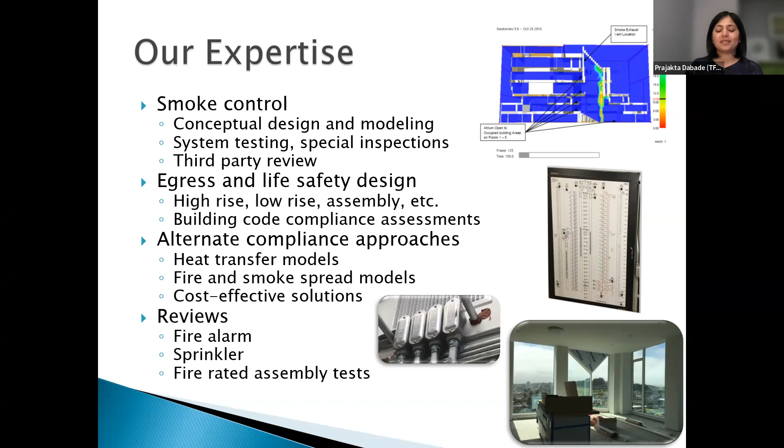So the general history of model building codes - if you go back to the 60s and 70s, if you've done any projects with older buildings, we've seen a lot of UBC, Uniform Building Codes. Eventually we have NFPA and IAPMO, and the ICC was formed, I believe, in the late 90s or early 2000s. California picked up the ICC code starting, I believe, 2007 was the first IBC code that we adopted. The code cycle is every 3 years, and now we are entering from our previous code cycle, which was 2019 based upon the 2018 IBC, into the 2022 brand new codes - very exciting, a lot of information.

Every day we look at projects, and every project has very unique requirements. We learn as code consultants every single day something new about the new code, so we're trying to share what we know thus far. Next time we talk to you, we'll have more information.

This new code - any project submitted on or after January 1st of this year will fall into this new code cycle. Of course there are exceptions - if you already had a project in plan check and had 1 or 2 cycles of plan review, you can continue with those. There could be some projects that are kind of grandfathered in, and they may continue with the previous code cycle. But anything submitted for permit in 2022 will fall into this new code cycle, including your tenant improvement projects. Next slide, please.

I would highly suggest, whenever you have a term and want to see what it really means, the first step is to go to the code's definitions and look for the term—like what is the secondary structural members per the building code. From chapter 2 you can, at least as a first step, find out what those words mean per the code.

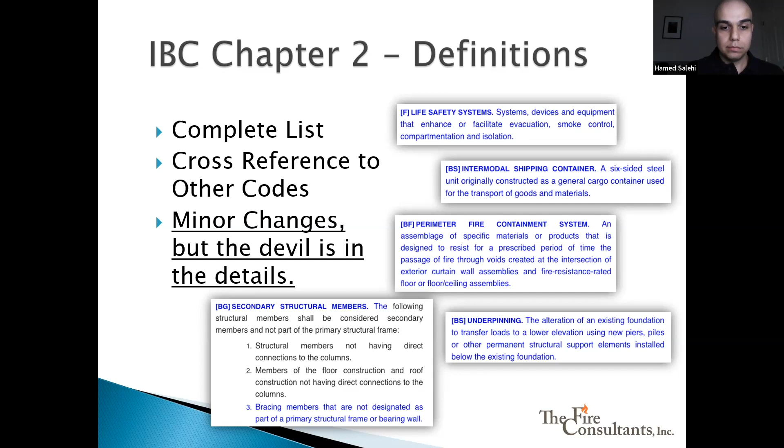As we move on to the next chapter, we have chapter 3. Chapter 3 basically defines the different uses and occupancies in the building, starting from the assembly group, going to business, all the way to different common or uncommon occupancies, and basically provides a short definition and some examples for each occupancy. And there are not many changes in the new code.

There are some definitions added for the special amusement areas, like the code added a definition for the escape room or the puzzle room, and then added some items for distillery brewing facilities, but there are no major changes in general in chapter 3 for the use and occupancy classification.

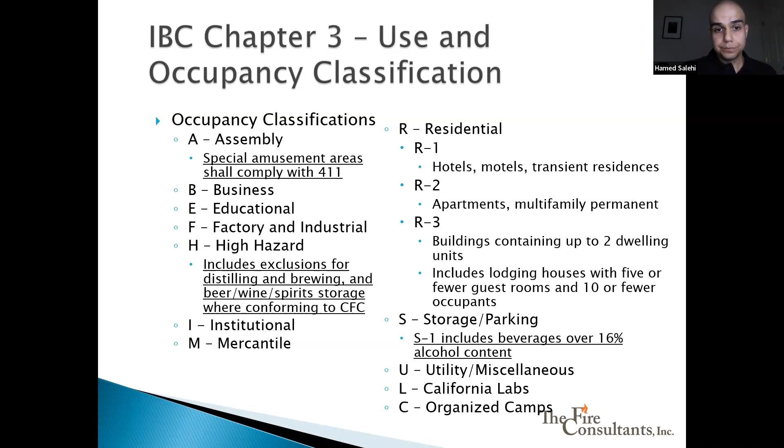As we move on, chapter 4 is basically providing the requirements for special use buildings. In general, we have two types of special use. One is the general special use, like high-rise buildings, atriums, underground buildings, which typically don't have any specific use or occupancy, but they can have different occupancies within them. But they have a general common feature, like a building that is going to be a high-rise, but it can be either a group B occupancy or group A occupancy or whatever the occupancy group is. But just being a high-rise building, it needs to meet certain features and code requirements. So those are covered in the first portion of chapter 4.

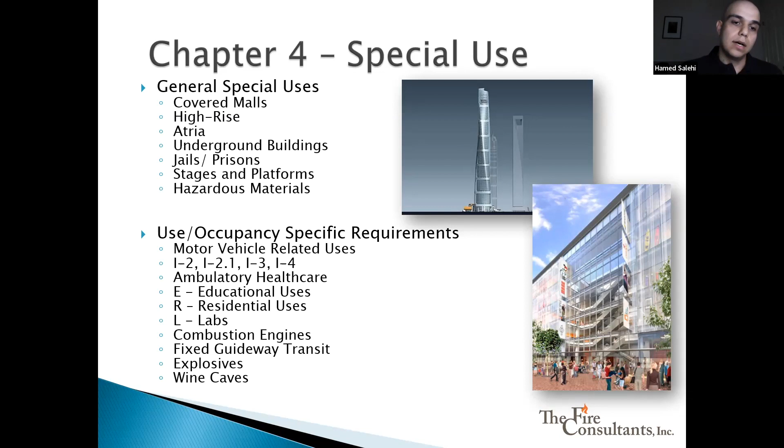And then as we move on in chapter 4, there are the occupancy-specific requirements, like what if you have a group R occupancy, what are the requirements? So if there is any specific occupancy with a specific requirement, those are all listed in chapter 4.

One example for the general occupancy is definitely the high-rise building. We've seen many projects where these requirements are applicable. Basically, the code defines a high-rise building when the highest occupied level is more than 75 feet from the lowest fire department access. If you have a high-rise building, then there are a lot of requirements that are applicable to the building, from smoke control to fire pump.

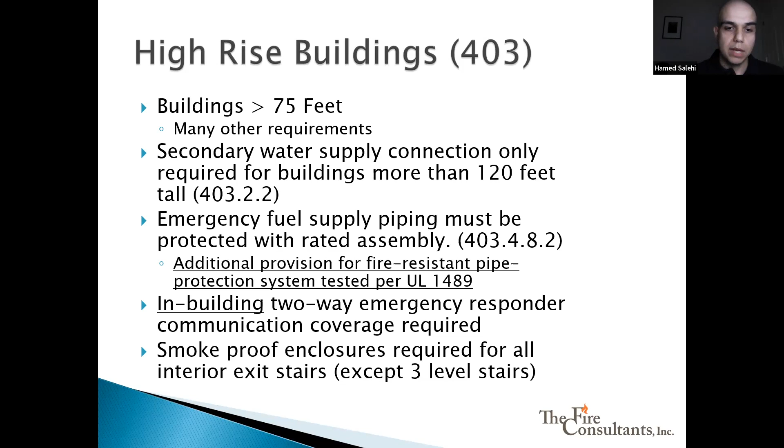And then there are some other items like secondary water supply for buildings more than 120 feet, or having the ERRCS emergency responder coverage, or having the smoke-proof enclosure, such as the pressurized stair. These are all listed in chapter 4 for the high-rise building. Again, we don't have many major changes in the new code for the high-rise building. Most of the requirements are carried over from the 2019 code, so there might be very small details that have been updated.

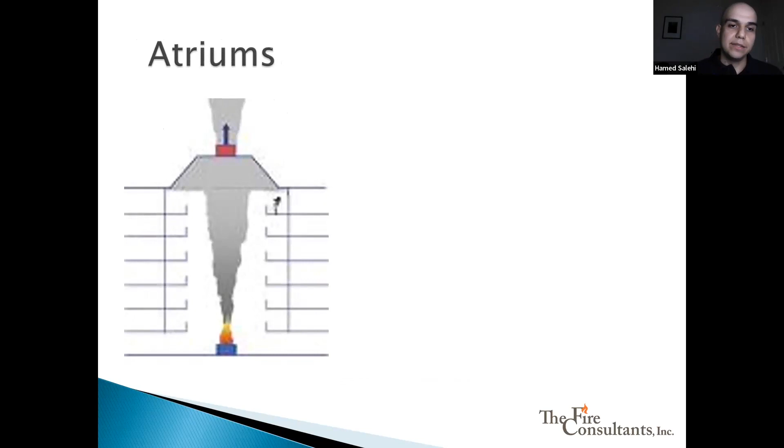The other type of project that is still under the general special use of the building is the project where you have an atrium. Per the code, when you have an atrium that's connecting more than 2 stories, then you need to meet certain requirements, the main one being a smoke control exhaust approach to avoid smoke spreading throughout the atrium.

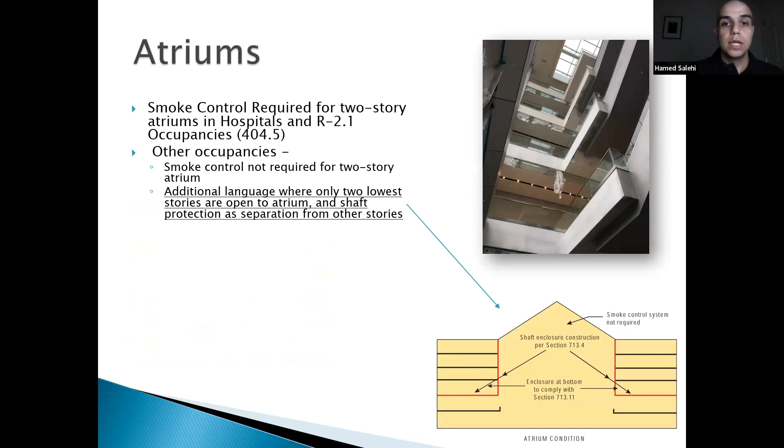So basically, if you have a fire inside the atrium, the fire produces smoke and reduces the tenability in the areas that are open to the atrium. Therefore, you need to add some sort of smoke control exhaust approach to avoid reducing the tenability in the areas that are open to the atrium. So whenever you have an atrium connecting more than 2 stories in a building, you have to go to chapter 4 and look for the requirements specific to the atrium.

There are some instances where you have an atrium, like this figure here, that is open to only 2 stories but separated with shaft construction from the other stories. This still might not require smoke control because it's only open to 2 stories. But if you want to open any other floors so that now you have more than 2 stories connected, then you would need to apply those requirements.

Per the new code, most of the requirements are carried over from the previous code. There are some updates for the egress through the atrium, which allows up to 50% of the stairs located in the same atrium. And then there are some more allowances for the openings in escalators and open stairs when we meet certain requirements in the code. But in general, most major items are carried over from the previous code cycle.

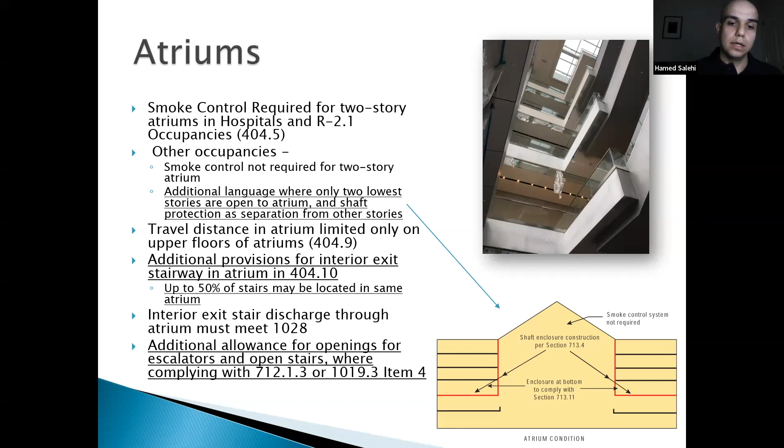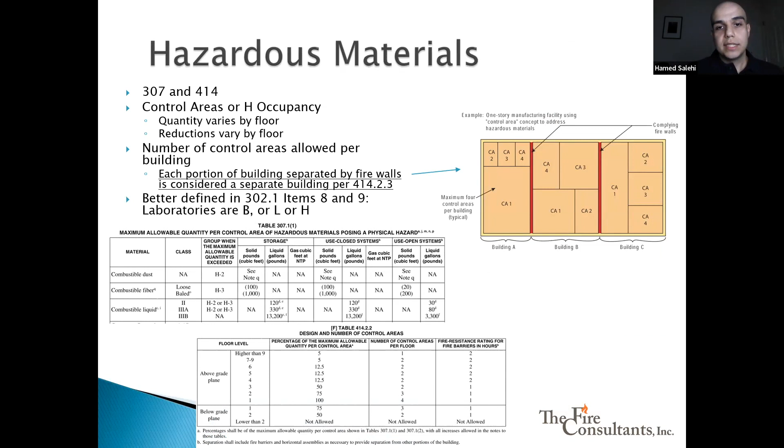Again, as we move on, we have other types of special occupancies, like group H occupancies. Basically, the code defines certain hazardous materials in chapter 2, and then chapter 4 provides the maximum allowable quantities of those hazardous materials. So whenever we exceed those quantities, the occupancy needs to be changed to group H. If we are going to group H, then again in chapter 4, there are a lot of different requirements for group H occupancy depending on the type of hazard, and we need to meet those in our design.

One of the changes that occurred in the new code cycle is that now, when each portion of the building is separated by a firewall, you can assume those as a separate building per section 414.2.3. So that helps you to calculate the maximum allowable quantities for each portion that is separated by the firewall.

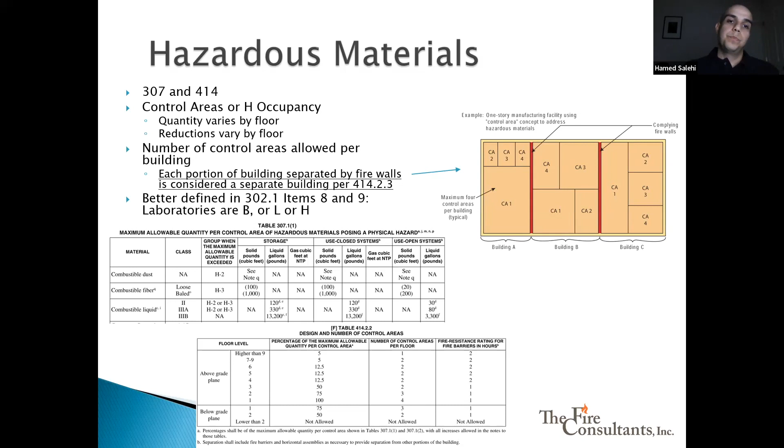But again, most of the other items like the maximum allowable quantities or the hazardous material definition all carried over from the previous code version. So there are not major changes in those.

A new section that has been added to chapter 4 for a special use is the mechanical access enclosed parking garages. You might see these, for example, like Carvana or other automatic parking structures where you just park the vehicle at the front and then a lot of mechanical automation happens to park your car somewhere. In the past, the code really didn't address these structures, but as we see them more frequently, the code provides requirements for these types of structures.

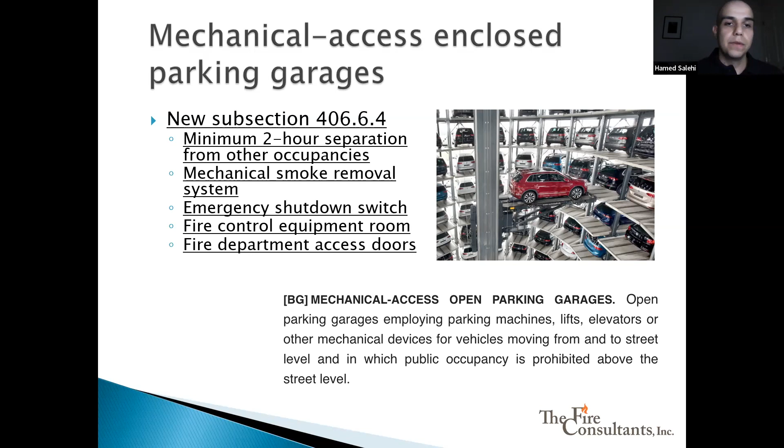Section 406.6.4 lists different requirements for this type of garage structure, including the 2-hour separation, adding a mechanical smoke removal system, emergency shutdown switch for the automation, fire control equipment room, and fire department access doors.

And then again, as we've seen more frequently, the special amusement areas have been updated. We've seen the puzzle room or escape room becoming more common, and they are being added to the code. So the code specifically says if you have this type of amusement area, you have to meet the chapter 10 egress requirements, or you have to have an approved alternative design, or have exits open readily, meaning not being locked, and being unlocked upon fire alarm activation, and also provided with a sprinkler system and the manual control for the exit door locks.

In the past, the special amusement section referred to a special amusement building, but now it's referred to as an area, which can be an area inside the building. So wherever you have a room that meets the puzzle room definition, then that room alone can be applicable to this section.

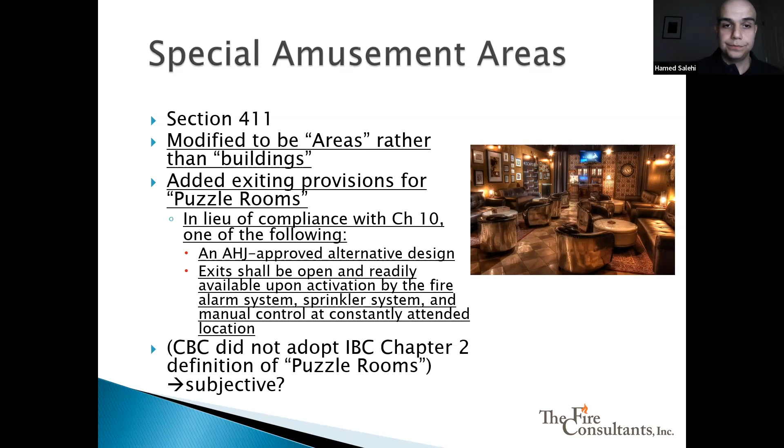Again, we have other types of special use and requirements in chapter 4; the other example is the group L occupancies. After the pandemic, we've seen many buildings, especially office buildings, want to switch to lab buildings. That happened for many of my core and shell projects; they wanted to have an office space, but when the pandemic happened, a lot of office work turned hybrid, but lab type work was still in person. So a lot of projects I was working on decided to change the occupancy to lab, so they can lease the areas to more tenants.

So basically, if you want to have a group L lab occupancy, it allows us to have more hazardous material, more than the maximum allowable quantities that we discussed. But it has a lot of different requirements and limits that are listed in chapter 4. But basically, there were no major changes in the lab requirements from the 2019 code to the 2022 code. But again, those are listed in chapter 4.

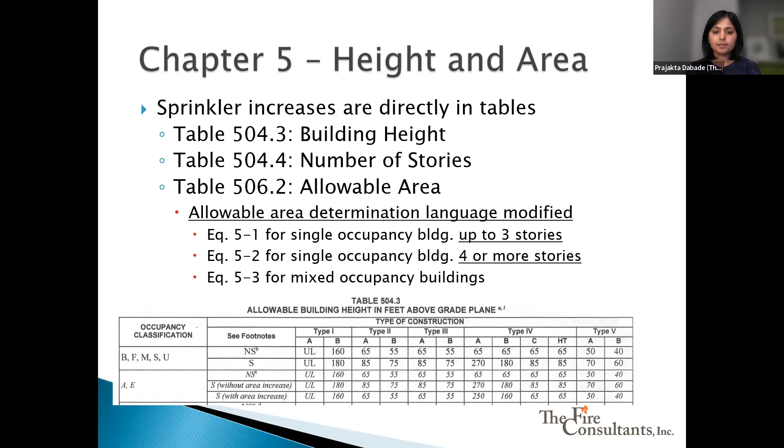Yeah, so I think the subtle change in these height and allowable area tables is that the sprinkler increases are included within the table now, and that's one of the changes. Next slide, please.

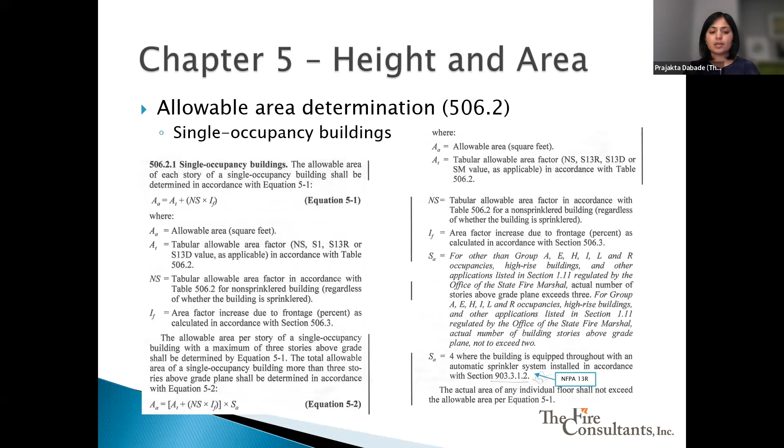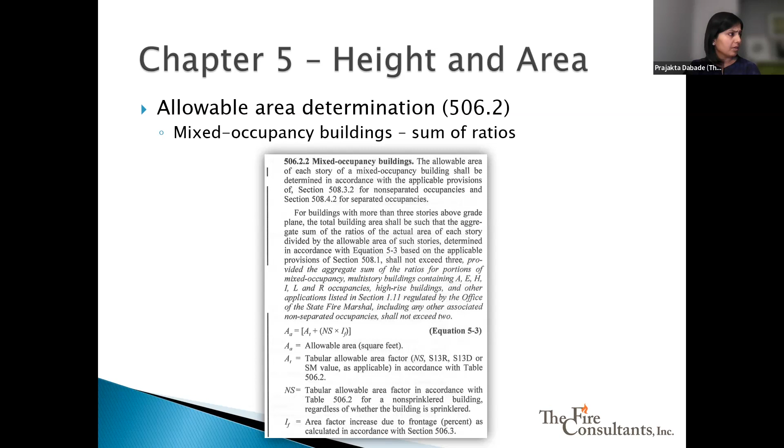Yeah, and then as you go through these equations, there have been some slight modifications to the equation itself, or actually more than the equation. I think it's again the fine print, I call it. Once you start applying, like, okay, it's a single-story building, it's a multi-story building. Do I have a mixed occupancy versus a single occupancy building? And so again, the mixed occupancy buildings, it starts with some of the ratios, and I believe it's in a couple more slides. I think we have an example of how to do the mixed area calculations.

And again, the allowable areas are a combination of: you have one base tabular area from that table that we just shared, and then if you have a building sprinkler, you add some percentage for sprinkler increase, and then you add some increase for your frontage. And again, in California, for state fire marshal buildings, the sprinklers can be used only for either height increase or area increase. We can't use both, unlike some other states.

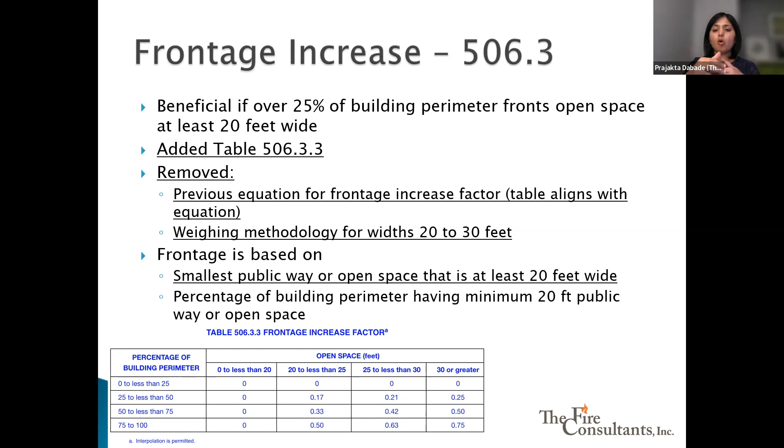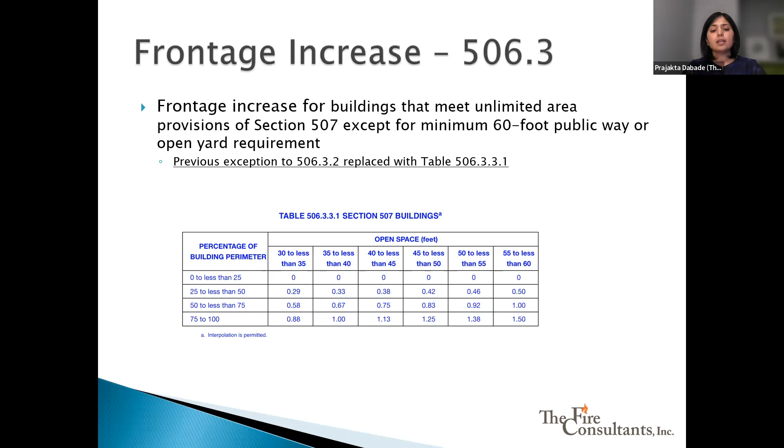So for frontage, what this 2022 California Building Code has done is, I think it is more streamlined: there is a table, you take a look at the table, and then you review your project accordingly. I think this table was not there in the past, so there was always the question of how do I calculate it. So this blue text you see is a newly added table. It just provides more clarification as far as what is the width of my frontage. You have a building perimeter, and the frontage is any side of your building perimeter that faces a 20 feet wide open space minimum. According to that, you can look at this table and use that in the calculations. Again, there are exceptions for some of the unlimited building area types that you can look into in chapter 5.

Yeah, next please. Occupied roof. So this 2022 building code clarifies the occupied roof. Just because you have an occupied roof, that doesn't automatically cause an extra story, as long as the rooftop structure meets the definition from chapter 15 for penthouses.

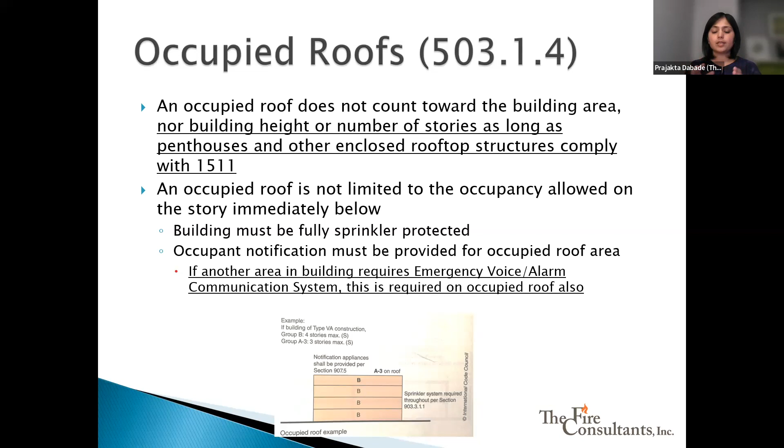So the mezzanine area, I think it's 1/3 the area of the floor below. And there are some special cases where you have sprinklers, and if you have a voice evac system, there are specific requirements in type 1 and 2 construction buildings. There are again special requirements for the dwelling, the residential buildings.

And the means of, oops, sorry, I saw the pop up on the questions, got distracted, sorry about that.

So again, there are subtle changes as far as the mezzanine, and on some projects it's very key, because sometimes I have seen the design team call this story a mezzanine. But when you start actually looking into it, it's a separate story. It doesn't meet the actual requirements of a mezzanine. So I think it's crucial to review these requirements to be able to correctly classify if it's a mezzanine versus a story. Next slide, please.

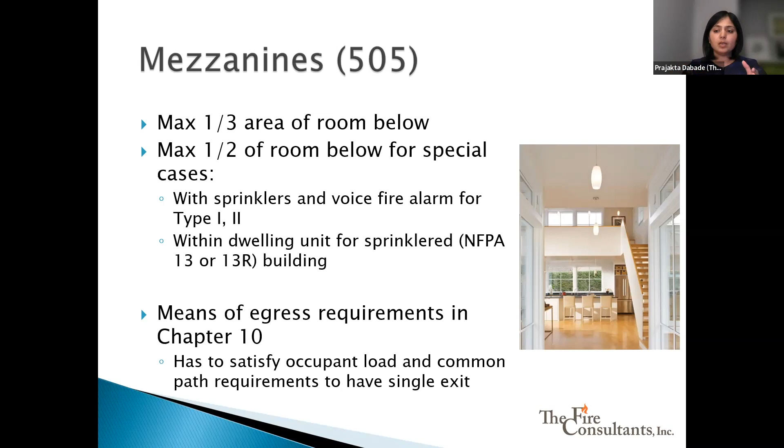Yeah, the mixed occupancy, maybe I will take a step back. In chapter 5, you can design a building, I believe, in 2 different ways. If you have a mixed use occupancy, you can do mixed occupancy non-separated use, or mixed occupancy separated use. The big difference between those 2 approaches is that when you design as a separated use, you are pretty much separating all the occupancies, and you are putting rated occupancy separations between your group A's and group B's and all that.

But when you are doing non-separated use, you're designing the building to the most restrictive occupancy as far as the overall allowable building area calculations, height calculations, your fire protection systems, fire alarm systems. And once you design the building to the most restrictive occupancy for all those requirements, most of the occupancy separations can be eliminated. There are some exceptions, such as group H occupancies, where you still need to put those occupancy separations. And again, this table related to the separations has been made a little bit more user-friendly as far as how you apply it. For example, if you have a group A occupancy, if it's sprinklered, and then you look at your group, trying to find B.

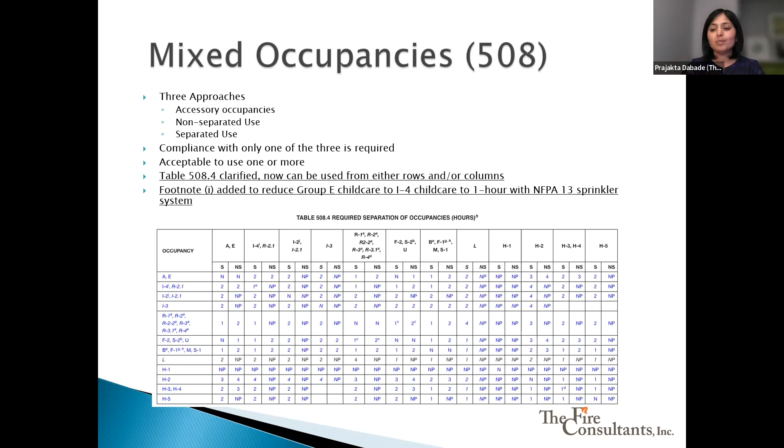And again, we're talking about the separated use, but if it's non-separated, then you don't need that separation. And there is always this accessory occupancy section where the accessory occupancy is your total of that particular occupancy. The area can be maximum 10% of the floor area. So if you have, again, just hypothetically, 100 square feet floor area, then the accessory cannot be more than 10% of that 100 square feet. 100 will be too small, but just hypothetically. Next slide, please.

Yeah, again, this is the overall accessory occupancy I just briefly discussed. It's the total of that particular occupancy. A classic example is you have a 4-story group B occupancy. If your conference rooms are less than 10% of each office floor, we don't have to worry about separating it. That's one way to do it. The other way, you design the building to the most restrictive occupancy and eliminate the separations between your group B and group A, which is your office areas and your conference rooms.

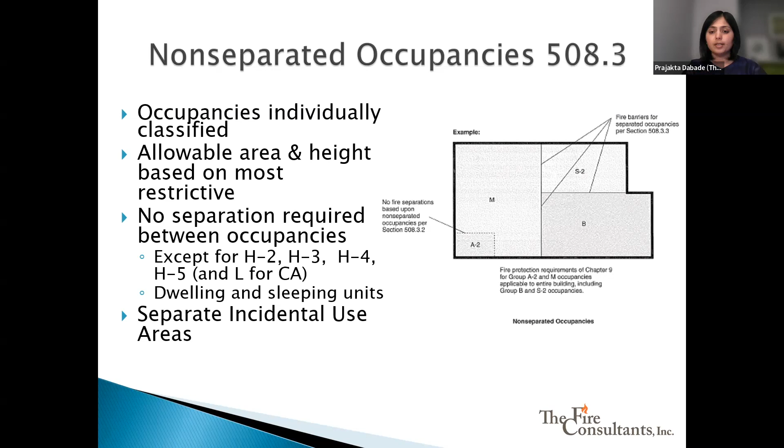Yeah, the horizontal podiums, these are our favorite residential apartment projects, where you have your type 1A parking garage, 1, 2, 3, whatever floors, and then a solid 3-hour separation. On top of that, you have your type 5s, type 4s, or type 3As. The interesting part of the design is the number of stories for your type 1A construction versus above your 3-hour separation, type 3 or type 5, are counted separately for separate construction types.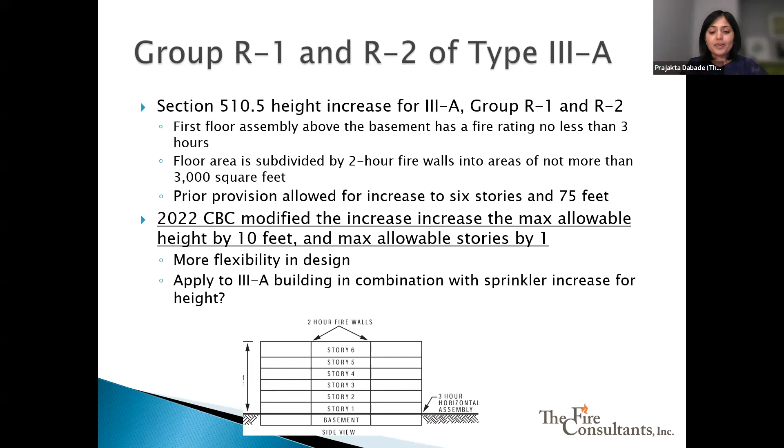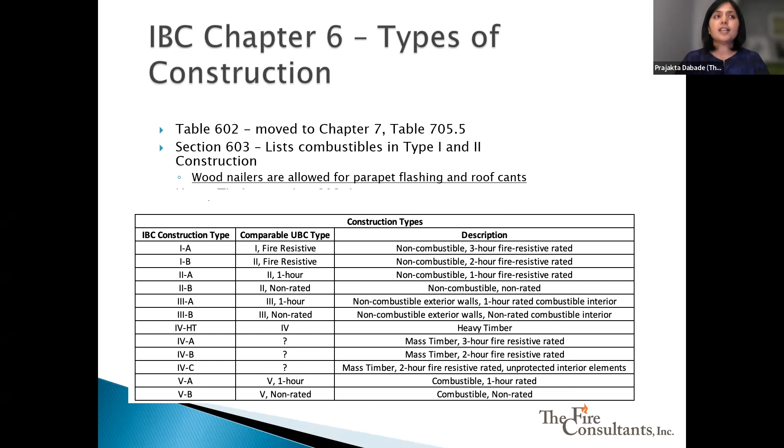Yeah, this is super interesting as far as the construction types. I'm looking at this slide as well, because I have a second screen where I can see the next slide, just FYI. So if you recall the 2019 code, the base California code didn't have the different type 4 constructions. It had only type 4 heavy timber. And then I believe it was July 2021 that the supplement came in, where type 4A, type 4B, and type 4C were introduced to the code.

And I recently came across this on one of the projects where I had to do some research, and it's very interesting. If you look at your type 4 heavy timber and type 3A, it allows use of FRT in the exterior walls. But if you look at type 4A, B, C, specifically 4C, it doesn't allow it. These are different construction types, but the interesting thing when I was looking through the code was that FRT is not allowed in type 4C.

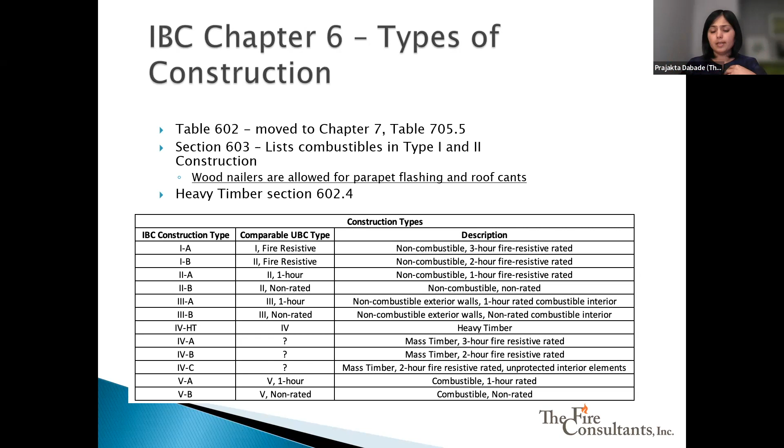And by doing that, the code allows another 3 stories of type 4C, because type 3 and type 4 heavy timber allow FRTs, so they have a lower number of stories than type 4C. Again, it's very interesting the way all these requirements are included. Next slide, please.

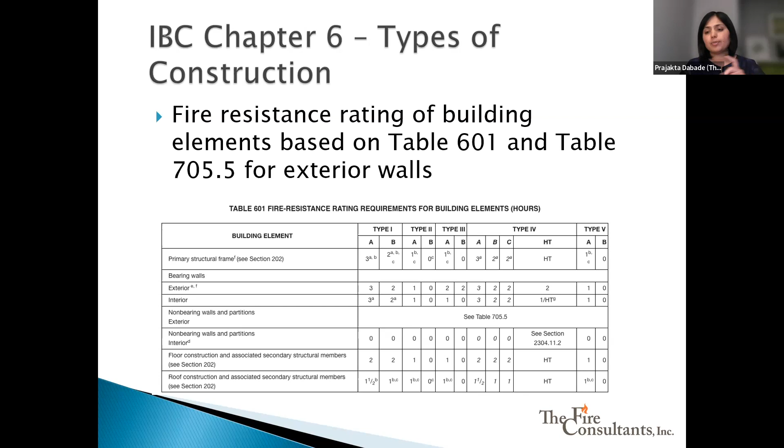Yeah, again, this is the table with the introduction of type 4C. It's not shown as blue because it is not quite new; it came in the July supplement. But at the same time, a lot of projects are coming up as type 4. And in chapter 6, there used to be table 602 regarding the exterior wall rating. That table is gone. It is not in chapter 6 anymore. It is moved to chapter 7, and we'll get to that table soon.

Next slide, please. And again, chapter 7 has a lot of subtle changes in the language, and once you start applying some of these requirements to the project, it makes things very interesting, like changing a word here and there, how it changes the interpretation and the application to the project. I think it's very, very interesting. So I will leave it at that, and we'll go to the next slide.

Yeah, so one of the changes is, for example, the smoke barriers. Generally, we see smoke barriers in R-2.1, assisted living.

You know what, just give me a second. My doorbell rang. I was expecting my son. He's in middle school. Just give me a second. Let me just open it. Sorry about the interruption.

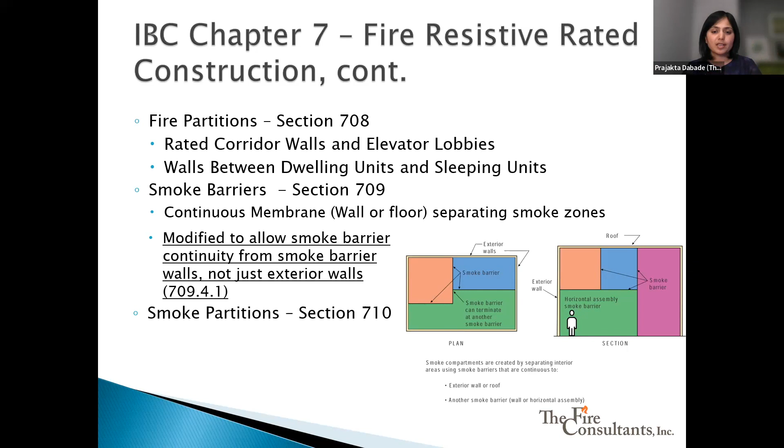Next slide please. I'll go through some of these slides a little quickly, because there are other slides we need to cover. As far as the overall changes in Chapter 7, there are subtle changes.

The atriums have some changes. The balconies and stories in Group A, A1, A4, A5 occupancies that are not considered stories, as long as they comply with 505.

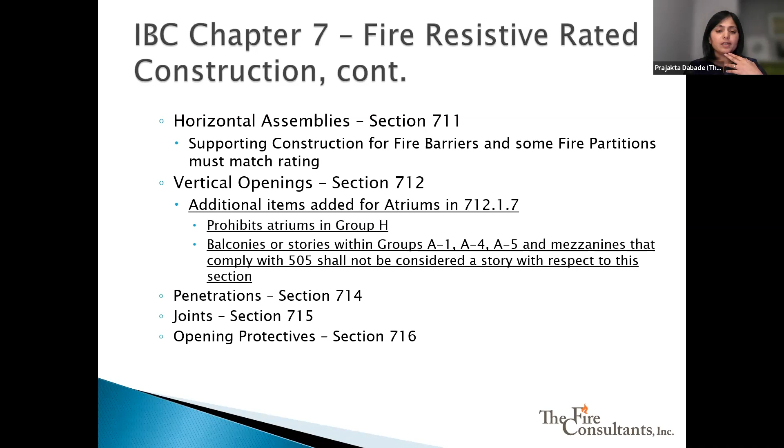Next slide please. The table that disappeared from Chapter 6, Table 602, has now showed up in Chapter 7. I think it makes sense, it just flows well, and they added more to it. I see all the Type 4 construction has been added to this table, so that's a change in moving things from Chapter 6 to Chapter 7.

Again, for the projections, there are slight changes regarding the overall projections, based upon the distance from the fire separation distance - how much you can project into or to the property lines, to the fire separation, the overall distance. That's changed here. Next slide please.

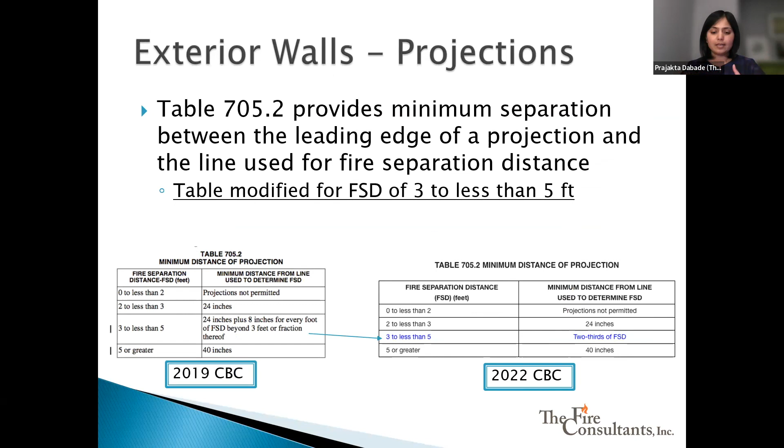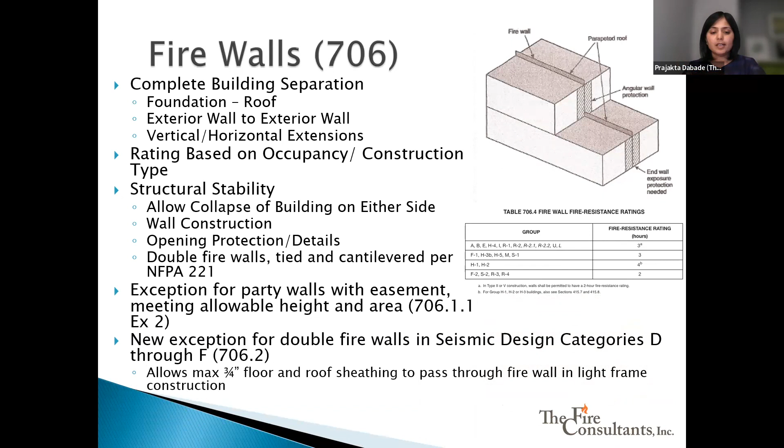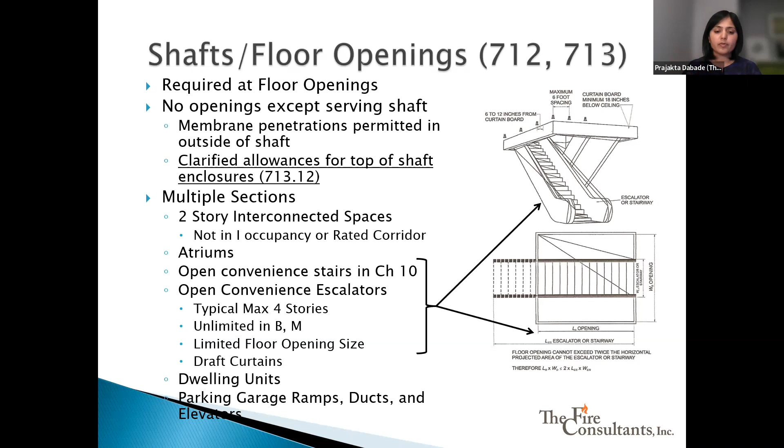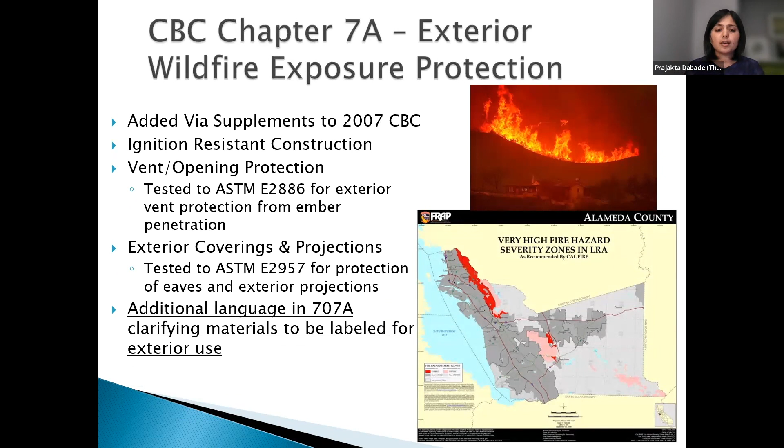Chapter 8 is all about your interior finishes, like class A, B, C. It's based upon what kind of flame spread you have or smoke development index, and it depends on all kinds of different tests that this chapter requires - it's ASTM E84. So the material, whatever you're planning to use, needs to go through all this testing before it can be allowed to be used.

And a lot of times there are products available in the market where, okay, my not necessarily interior finish, but like my duct - it needs protection. Instead of having a horizontal shaft, can I wrap it? Are there fire-rated options I can use? I think the key is the California State Fire Marshal fire listing, and that's necessary for a lot of projects.

The ICC-ES reports are also really helpful to justify alternate methods and stuff.

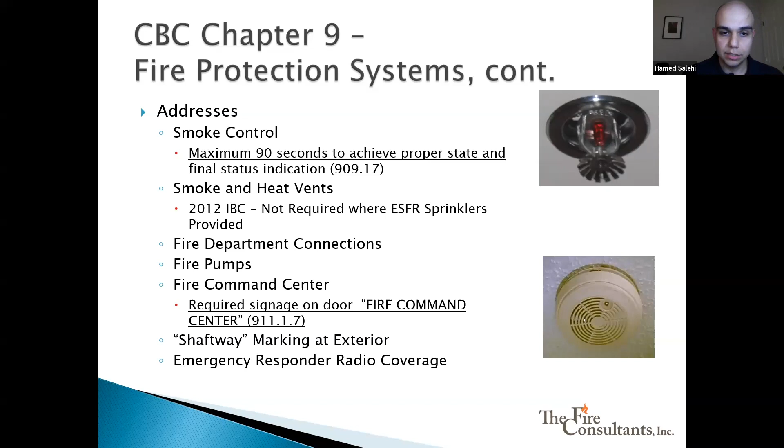Chapter 9 also discusses fire department connection, fire pump, and fire command center, and specifically the new change for the fire command center asks for signage, where before it was open to AHJ interpretation on the signage itself.

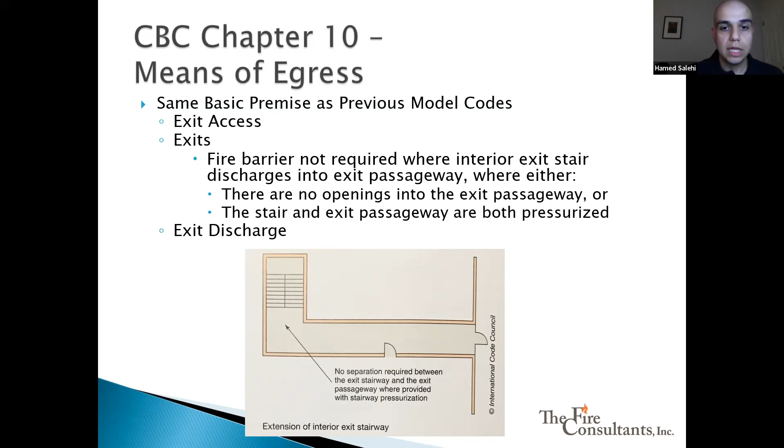Moving forward, chapter 10 is definitely one of the most important chapters for us as fire protection engineers. It discusses egress and exiting requirements in different buildings. Most of the requirements from chapter 10 are basically the same as the previous code, and we're not anticipating many changes in these chapters.

In chapter 10, we have the occupant load calculation, table 1004.5, which lists the occupant load calculation for each occupancy.

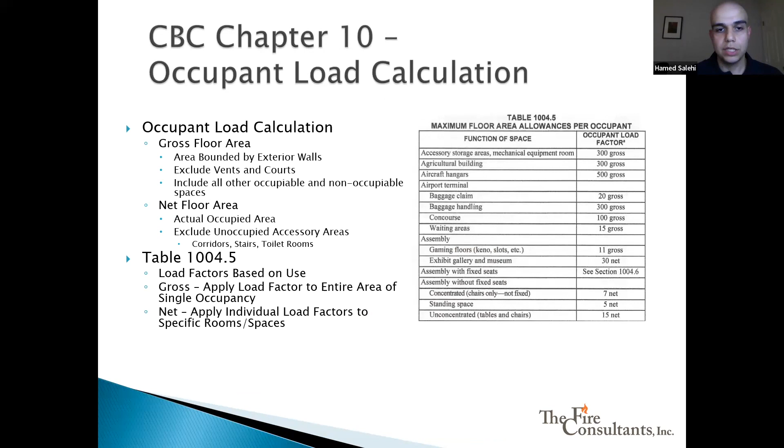In the 2022 code, one change that's been added is the requirement for smoke control in smoke-protected assemblies. But in general, we design egress based on occupant load using the occupant load factor of 0.3 and 0.2. If we have sprinkler and voice evacuation systems, we can reduce those occupant loads, except for group H or I occupancy. These are the same as the previous code.

There's a new requirement added for unoccupied mechanical rooms and penthouses, adding some exceptions for those. Also, for electrical rooms, instead of meeting the CBC, you now need to meet NFPA 70 requirements.

In general, the code doesn't allow passing through more than one level when exiting to the exit access. In the new 2022 code, some exceptions have been added to this requirement where you are exiting through the atrium or exiting through the open stair between the occupied roof.

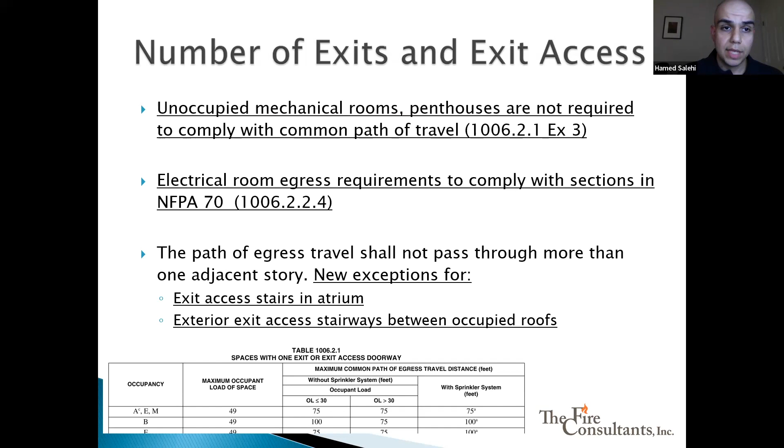There have also been some minor updates to door sizes and stair landing depth in the new code, as well as another change in the code language.

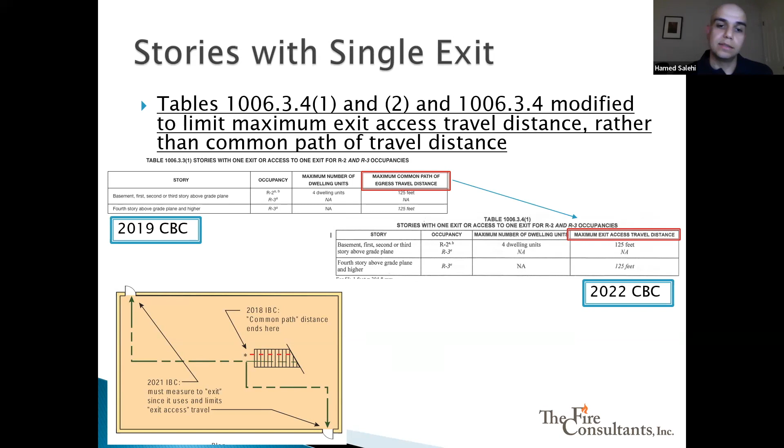In locations where you can have only one exit, the 2019 code language used to limit the maximum common path of travel from those areas, where in the new code it changed to maximum exit access travel distance. That's one of the changes in code language and might affect egress design per the new code.

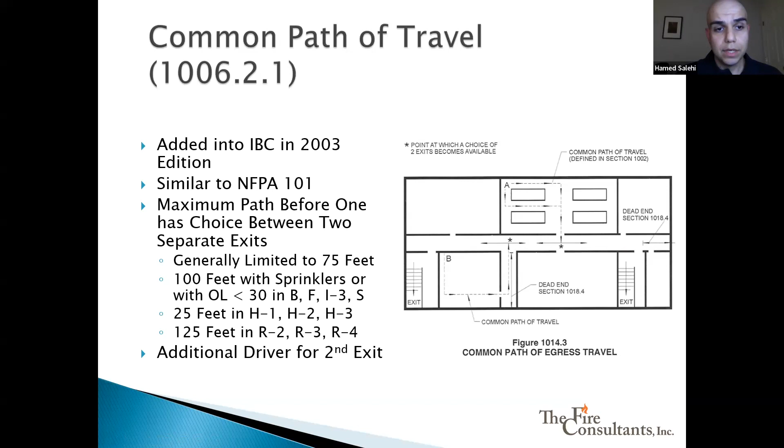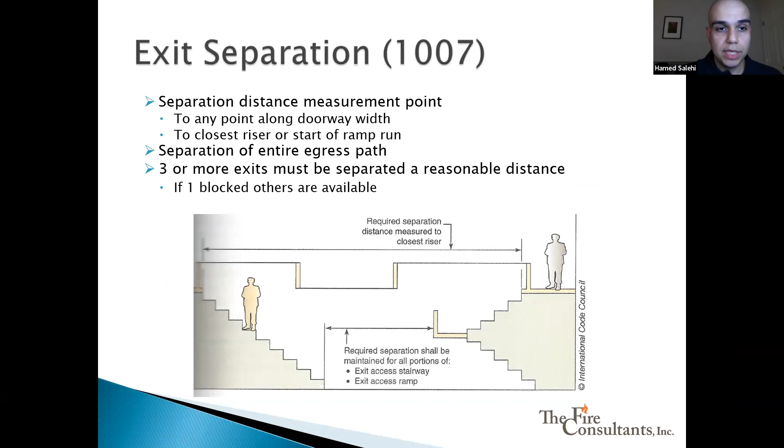There's also a requirement for exit separation. It says where you need more than one exit per code, the exits need to be separated, whether you need 3 or more exits, or even just 2 exits. This requirement is the same as the 2019 code.

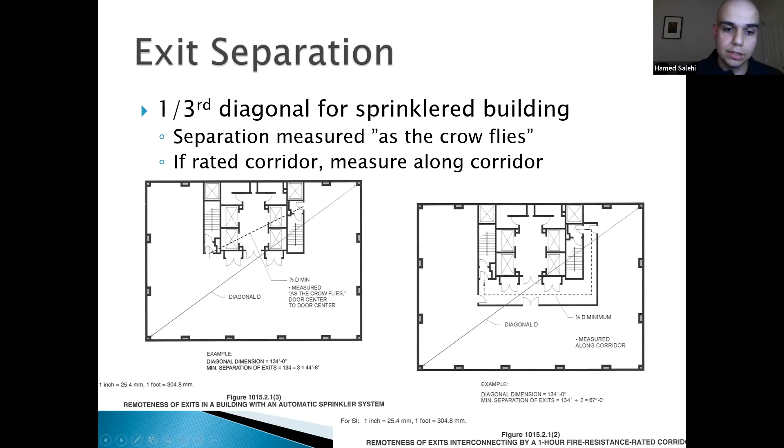It's 1/3 of the diagonal for sprinklered buildings between the 2 exits, or 1/2 for non-sprinklered buildings. If you have a rated corridor like here, you can measure the exit separation throughout the rated corridor instead of just a single line between the 2 exit doors. There are some other updates in the code language.

The code provides the maximum exit access travel distance in section 1017.2 in the table, basically carried over from the 2019 code. It says if you have 2 exits, the requirement needs to be measured to the nearest exit, which added more clarification than the previous code. But there's still no changes since then.

The other changes say the exit is permitted through an elevator lobby in except group I occupancies. But when you need 2 exits, at least one of them shall not pass through the elevator lobby.

Section 1019 is almost the same as the 2019 code. It provides requirement for the exit access stair, and one of the main ones was the exit path cannot pass more than 1 story going through the exit access stair. But this section added new exceptions for the exterior stair between the occupied roof, so it allows travel more than 1 story in those conditions.

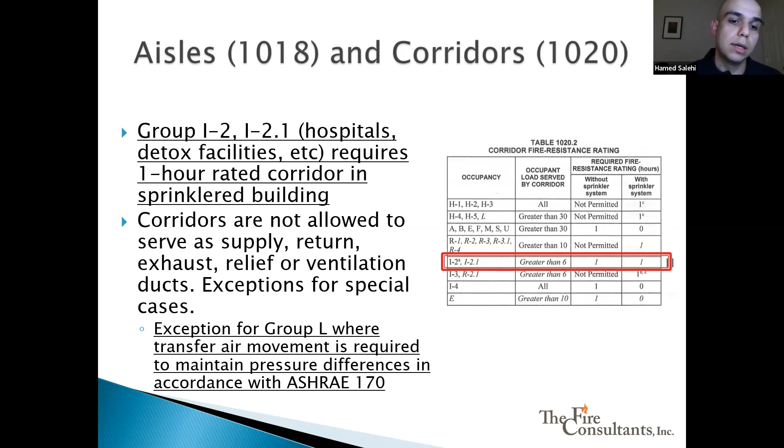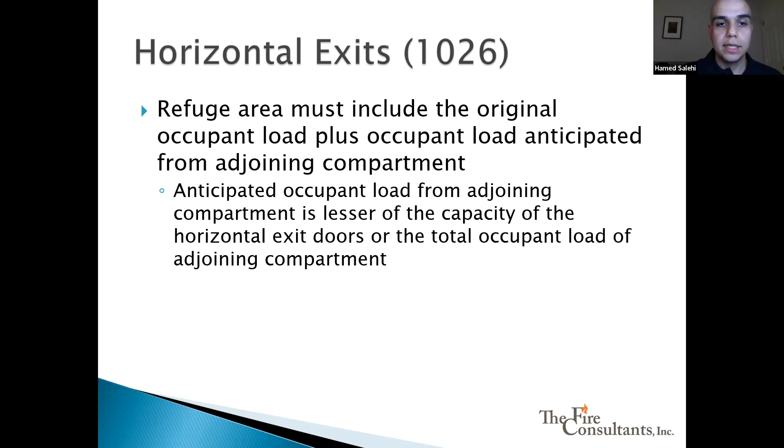Then the code discusses the horizontal exit, section 1026. I'm moving faster as we're getting to the end of the presentation. These horizontal exits are basically a rated wall. Whenever you pass the wall, it feels like you are outside the building. So the wall needs to have a rating requirement, and then both sides of the wall need to have a refuge area.

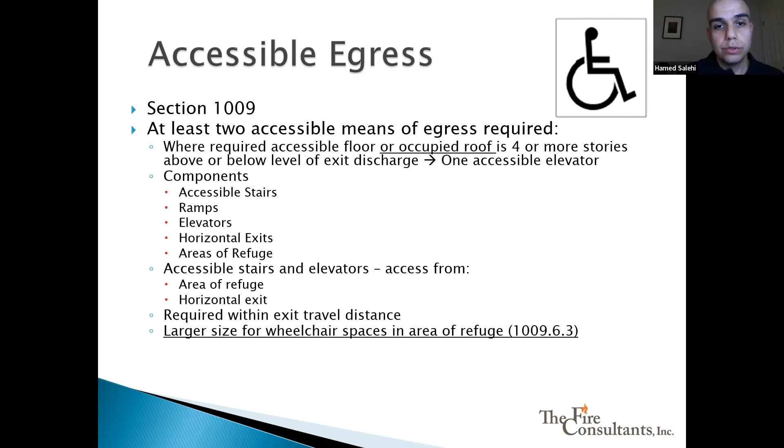Chapter 10 also discusses the accessible exiting. There are some changes for the size in the wheelchair space for the accessible exiting. Then the requirement change for the accessible elevator requirement now includes occupied roofs to consider for the accessible elevator requirements. Section 1009 discusses the accessible egress for the mezzanine, and saying in the other areas, if you have the two-way communication, you can utilize some exceptions there.

As we go through chapter 10, section 1010 discusses the requirement for the exit doors. There are not major changes, except that the sections have been rearranged since the 2019 code. There are some more allowances on the locking devices since the 2019 code.

There are some changes in the latching operation for the exit doors.

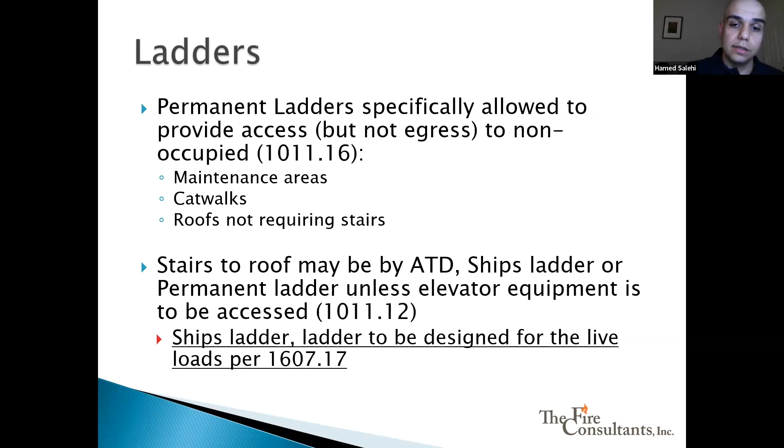The other exit element discussed in chapter 10 are the ladders. Usually the code doesn't allow using ladders in the exit path, except in a very unique situation on the roof where the access is just for the maintenance area, not for the occupied area, etc. The new requirement for the ladder is just adding the live load calculation for the ladder, so now it needs to maintain or hold a specific live load per chapter 16.

There are also some changes in the section numbers. The egress courts moved to 1029. The assembly moved to 1030. So these are basically the code sections and chapters moved to different sections.

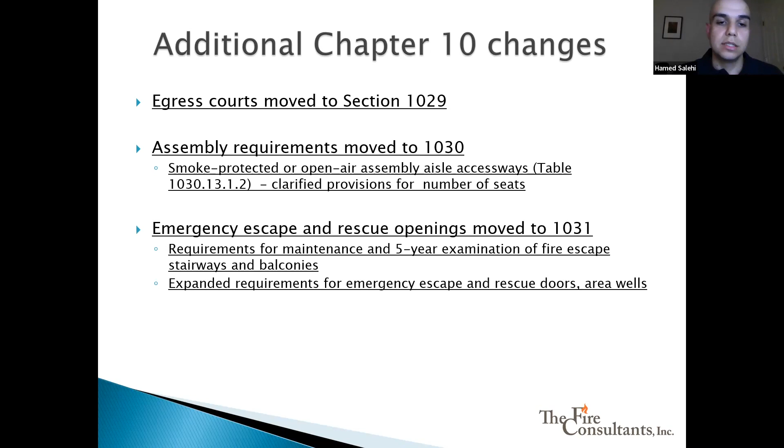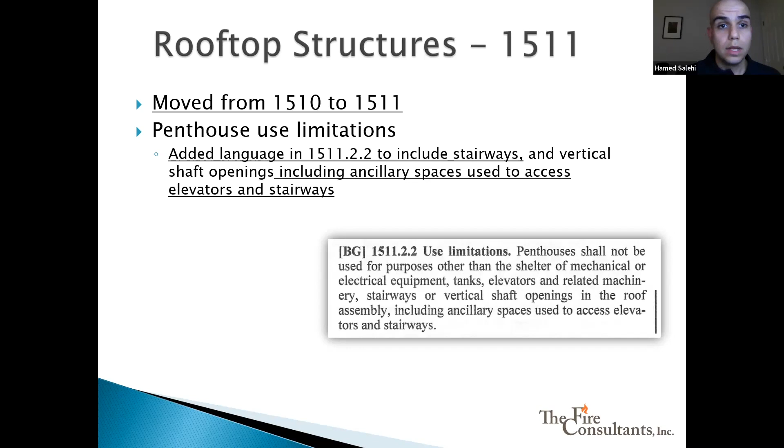As we move through the code, we have the rooftop structure in chapter 15. There are some changes in the section numberings and those stuff, but basically the same as 2019.

The building code also discusses the elevator requirement in chapter 30. There are some changes in the elevator requirement, such as the elevator communication system in chapter 3001. The code specifically says that FSAE is not required for the below grade parking garages. This has also been in the 2019 code with July supplements, but the new requirement adds an exception that the FSAE is not required to serve the top floor where it's being used for equipment only.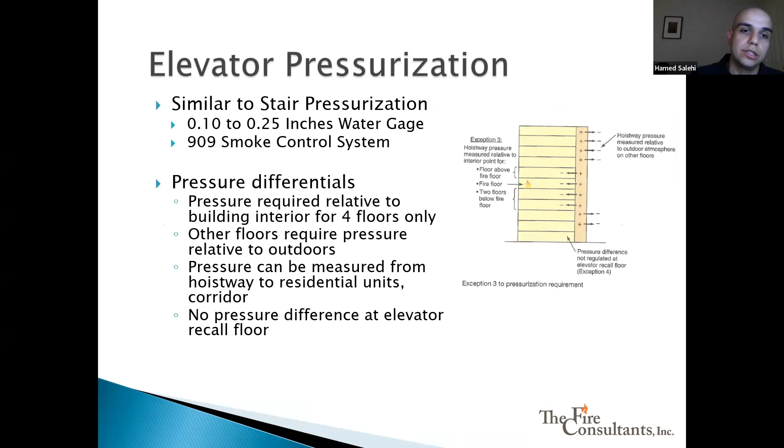And then chapter 3006 discussed the requirement for the elevator hoistway protection and lobbies. Basically it says elevators require a lobby except on level 1 or the level of discharge, or where the elevator opens to open parking garages, and it also discusses the option to add pressurization instead of a lobby. Although this might not be very common, there are some issues during the design and use of elevator pressurization, as we've seen in previous projects. So this is not a very common approach.

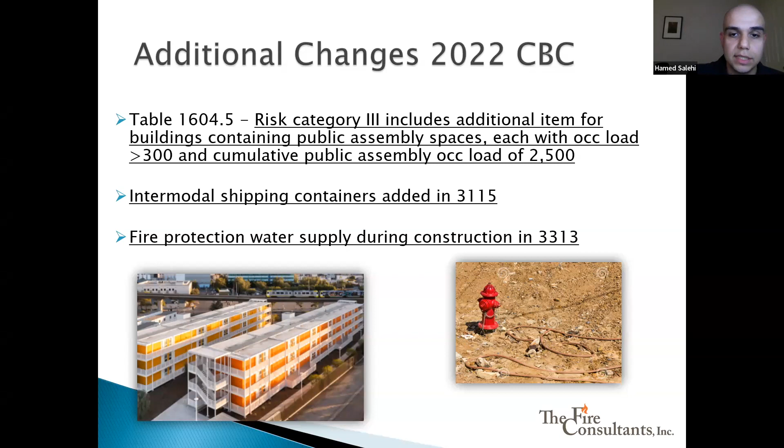Most projects prefer having a traditional lobby or other approaches to protect the hoistway. The other change to the code is to risk category 3, which added buildings containing a public assembly space with an occupant load of more than 300 and a cumulative public assembly occupant load of 2,500 to risk category 3. And then there are some other changes in sections 3115 and 3313 in the code.

Also, the California Fire Code has been updated to the 2022 version. The most important change was adding the new portable generator and electrical energy storage system requirements, as I mentioned before, as we've seen more fires recently in those occupancies.

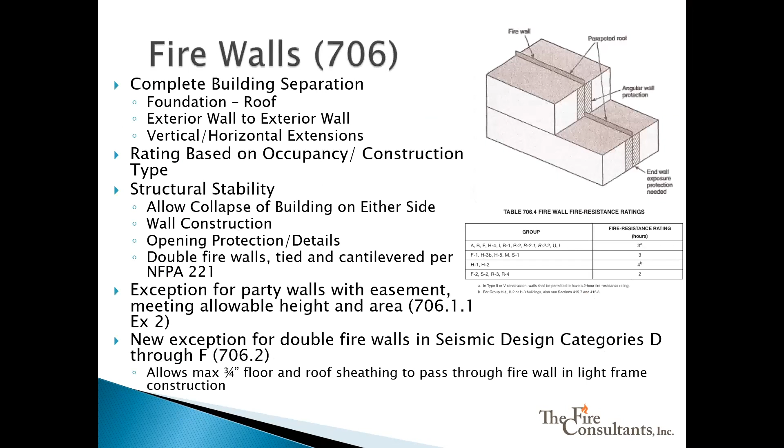I had a couple of questions, and I may have written something down wrong, but there was table 705.5 or 705.8. I scribbled, so I wasn't sure if I got it right. 705.5, it's regarding the exterior wall separation. Right, the exterior openings. Now, does this apply to single family residential as well?

Let's see. It will be under R3, under the occupancy. To answer your question, I'll have to take a look, but generally this table applies to all occupancies, and there could be very specific exceptions or requirements related to a specific occupancy. Okay, so we need to check that in terms of the occupancy. That was my question, because some of the restrictions looked difficult for single family residential.

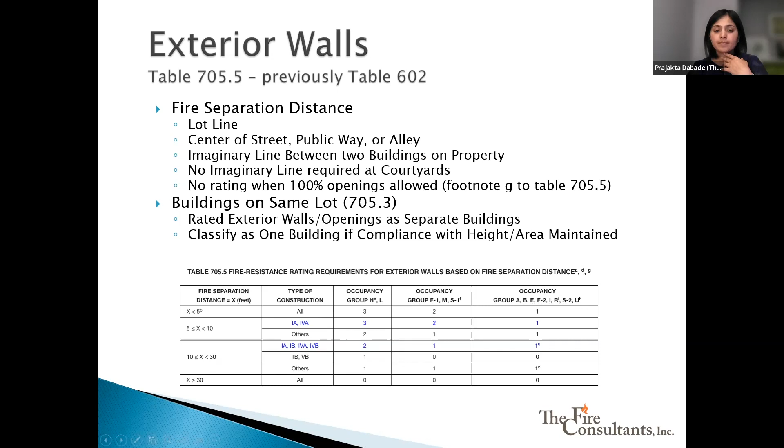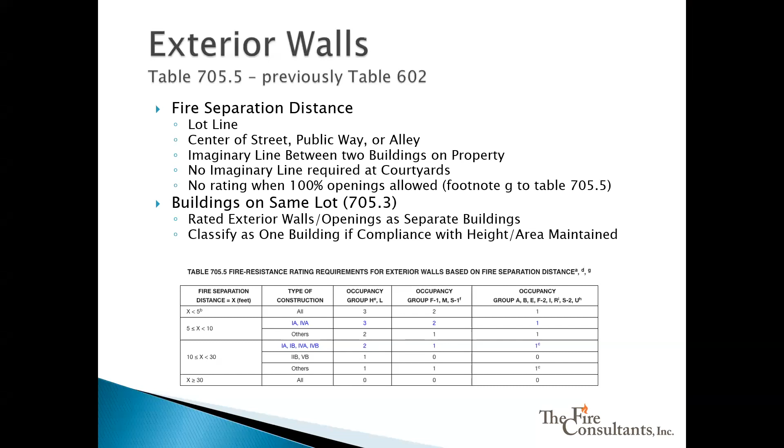Then I had another question about NFPA 13R. If the height limit is reduced to 30 feet, what happens to 3, 4, or 5 story buildings? Because 30 feet is really only a 2-story building.

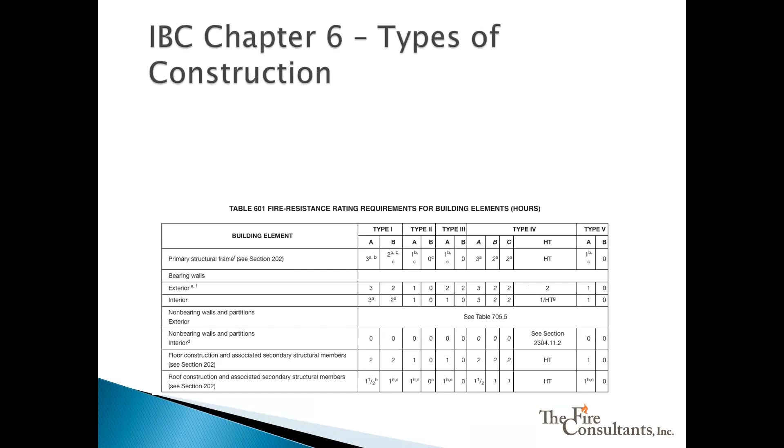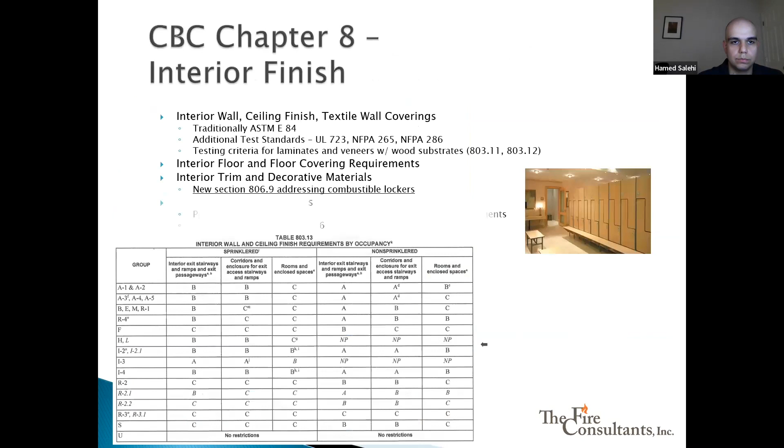Yeah, so that's the new. Go ahead. You go ahead. Yeah, that's a new requirement. So whenever you have more than 30 feet, I think it was in chapter 9, you cannot utilize the NFPA 13R. So, basically some jurisdictions, they're really reluctant to use NFPA 13R anyway. So,

Yeah, I think the difference between the 13 and 13R, again, at a very high level, I think 13R allows exceptions in some specific areas to eliminate sprinklers in some of the spaces in the building, versus 13 is pretty much sprinkler throughout. And NFPA 13 is always considered to be a more robust system than 13R. So.

Okay, so we'd have to look at the exceptions and such. I'm just trying to figure out at what point that applies. Yeah, it's going to apply for 3-story buildings. So I would definitely look at the particular section, if there are any exceptions. Right. Okay. Thank you very much. Appreciate it. Thank you.

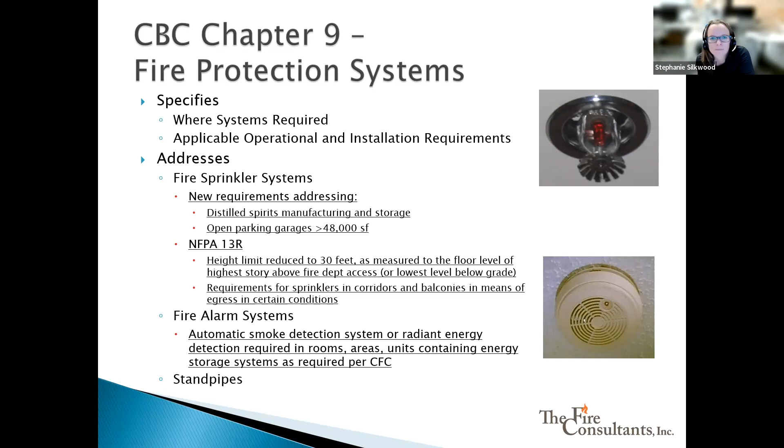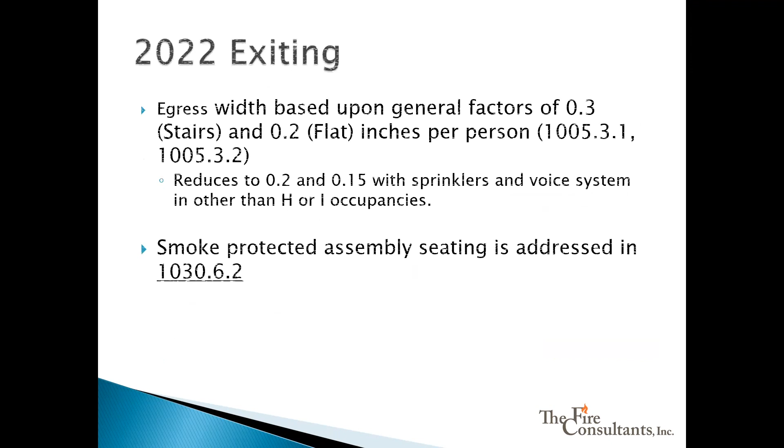Sure. I was just trying to get clarification on the comment mentioned about elements that can penetrate an exit enclosure. And I know there's pipes and certain exceptions that have been used over time, but there was a comment about structures, or structural elements, can no longer penetrate. So can you explain that more? Are you talking about the supporting structures having to be independent for the stair itself?

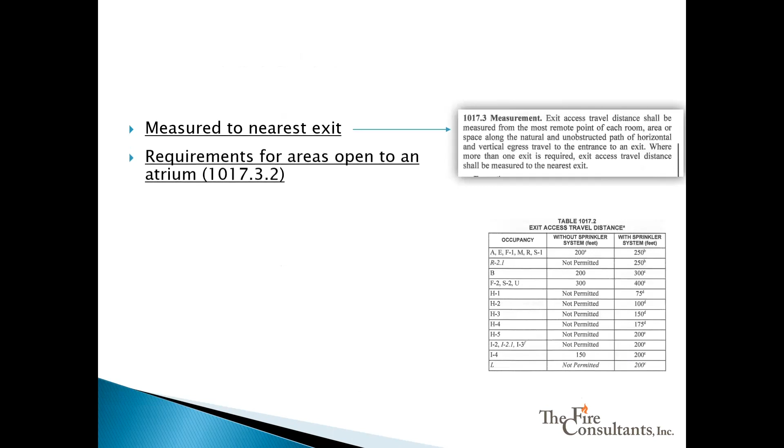So basically it's for the penetration itself. If you have the stair wall, you have to maintain the elements inside the stair itself. So basically, you cannot penetrate the stair wall per the new exceptions.

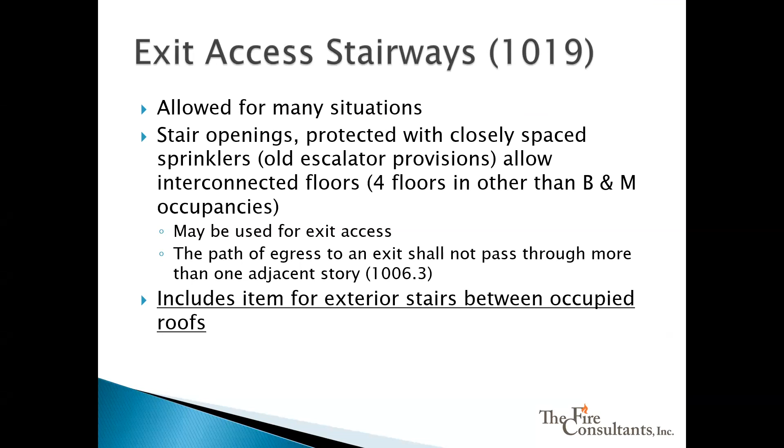So an example would be a multi-story enclosure, multi-stair landings, and usually the structure extends into the stair enclosure and supports the walls and supports the landings. So it's not quite clear how you would make that independent.

So basically, I think that is part of the roof construction. You can use the roof construction as a support, but then you cannot penetrate the stair wall with a joist to support the exit stairway. I don't know if that answers your question. A little bit. I'll look into it more, but thanks.

Liz, did you want to talk about your question here? You were asking if construction of an essential services building requires an IOR outside of schools. I was just curious if anybody knew, we've got all these new codes and all of the constructability issues, and schools require an IOR, but do all essential services buildings require an IOR? If anybody happens to know?

I mean, to look at the question that was just asked, to make sure that there aren't inadvertently any supporting elements penetrating exit walls. Yeah, me personally, I don't have experience with IOR, but if anyone else wants to chime in. Yeah, the inspector of record is what I'm thinking. Yeah, I think the IORs are typically, I have seen them for HCAI, like hospital projects. I do not know about the essential, so sorry. No, that's okay. I just thought, since you were all here and paying attention, I'd ask. Thanks.

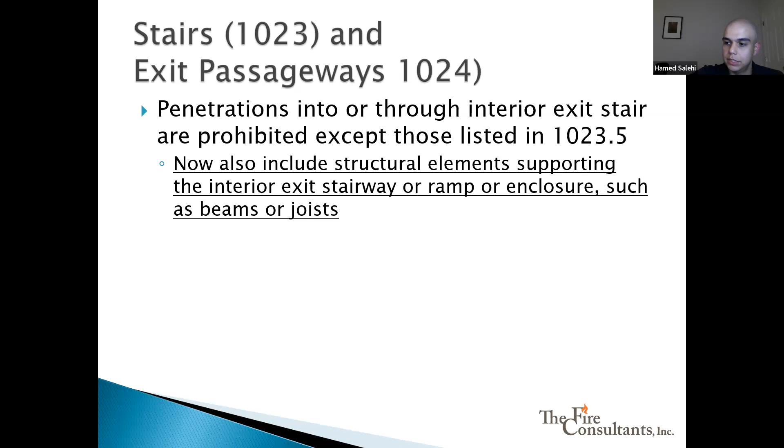There's a requirement saying that if those bracing members are connected to the fireproofed element, then you need to extend the fireproofing 12 inches along the bracing. But in general, yeah, there's that exception that can be applicable.